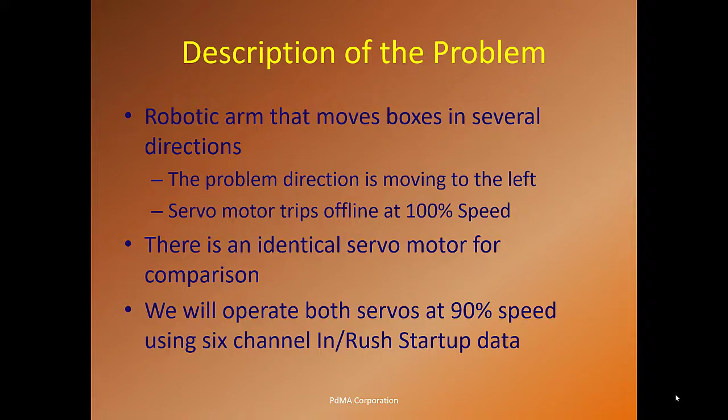So here's our scenario: it trips off at 100%. We're going to bring both our comparison servo and the actual problem servo to 90% and see what kind of data we can collect. We're going to bring in the MCEMax to help us out, and look at the online technology at this moment, and you can see just a little bit different. Here's the arm moving from the right to the left, right, left, right, and we're capturing the current and the voltage on all six channels, all 3 phases of current and voltage.

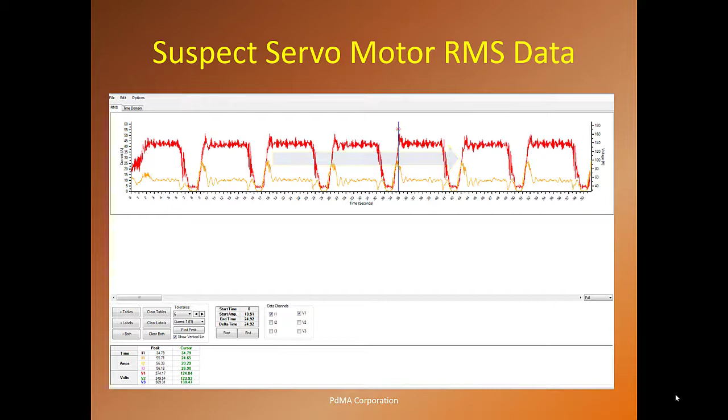And what is this telling you, Noah? Well, it's interesting because it is a lot of data, but when you break it down the way you have, where this is left movement and this is right movement, it starts to really take life. One of the things I remember jumping on early is, look at this current signature as it's moving to the right, it seems to be a lot less variable than the signature moving to the left.

So that kind of cyclic loading makes you have to question things. In fact, we start to lean a little bit towards a machine train anomaly, in that what in the load could be creating a different left load versus a right load. Is there maybe mechanical binding? Because you don't necessarily have it honed in yet to what this problem is.

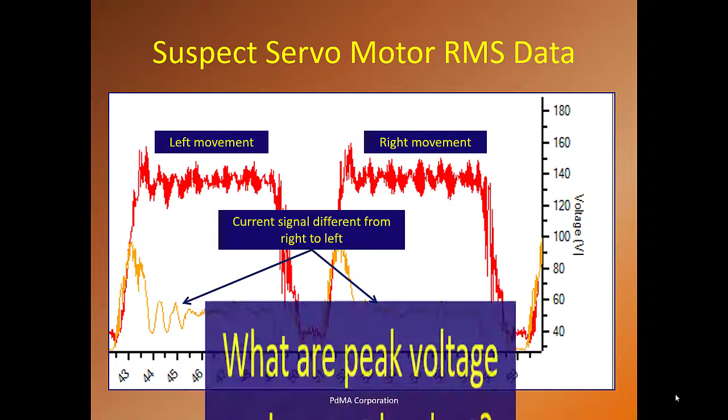So we're going to take some more tests, or look at different data points to see if we can get a better idea. Is it mechanical? Is it electrical? So we're looking at the peak voltage and current levels.

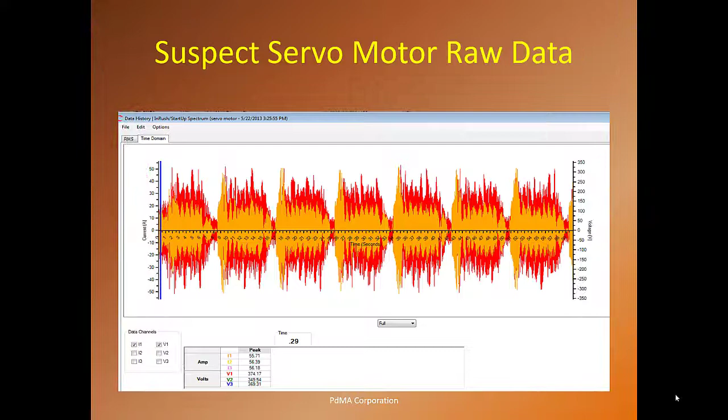What are they at? If I move on here, I can look at what we collected for the right movement and the left movement. Here our voltage and current is at 374 volts and roughly 55 amps, almost 60 amps, for an interesting voltage value. I remember thinking at the time that it's kind of a rare voltage to see coming out of a normal 460 to 600 volt supply. You're going to go through the drive, and you do expect it to change a little bit, but at 90%, it's a very interesting number.

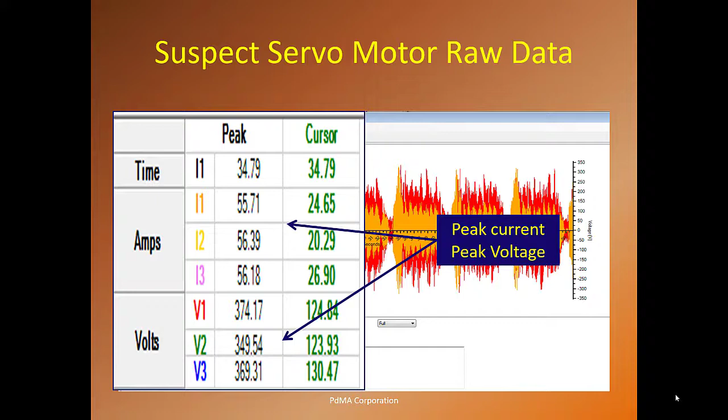So we're going to pay attention to this. Remember, this is your suspect servo raw data showing 350, 340, 370 volts versus 55 full load amps. So let's see what the actual one that isn't giving us a problem looks like.

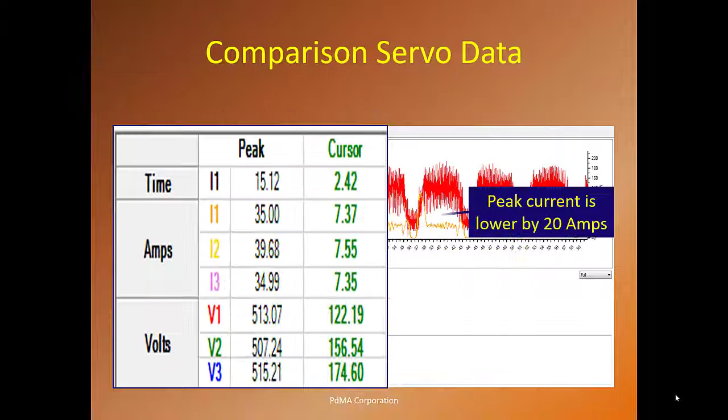And if we pull this in again and we're looking at the left movement, right movement — this is actually for the right movement now — you can tell the voltages are completely different and the current is much lower, a significant increase in the voltage to the healthy motor. When you think of the power equation, a higher voltage is going to result in a lower current for the same power demand, and in this situation you can see we're down under 40 amps.

This is a significant load difference for exactly the same demand of 90%. You're talking almost a 30% decrease in current. What does that do to a motor if it's running 30% higher over time?

Well, once you approach full load and you're running that much higher, you've heard the thumb rule — for every 10 degrees higher than design, you're going to reduce the insulation life in half. So even if they're not exceeding design at this point and they're going to trip the motor out, it's way overburdening the motor.

And it kind of now drives us more into maybe electrical, right? Not mechanical. Exactly, originally we were sort of leaning towards machine train. Now, when you start talking about voltage variations that are improperly being delivered, now we're going right back to the power supply and to the servo drive and looking at that.

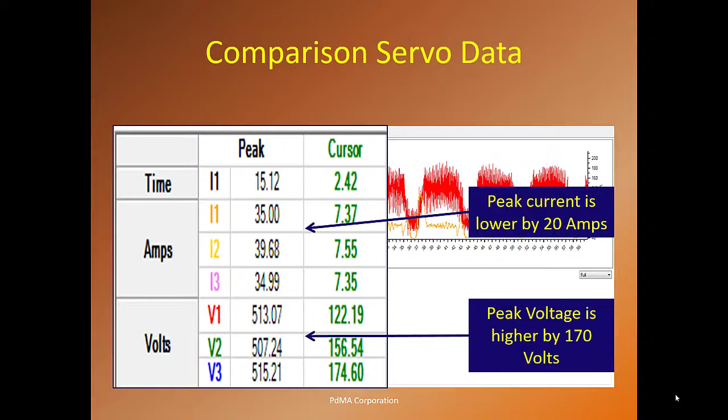And we can see here it's 500 volts versus 350 volts. That's a huge difference. Monster.

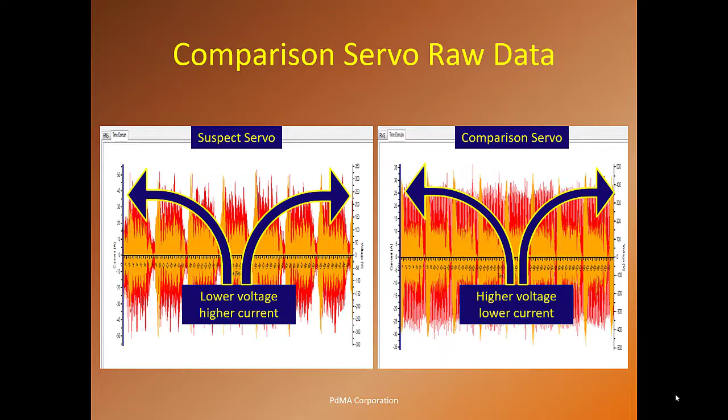Now, we always like to go back and think about other things to consider when we're doing servo analysis — give you little tidbits of information out there. Can you explain some of these for us?

Yeah, one of the things that's interesting with servos, and you and I kind of talked about this before, is that servos are very application specific. They're not sold into a common environment. So it's critical to get that baseline. You always hear us harp about getting the baseline, and when you don't have one, at least compare it to a like servo — which one of these is not like the other, that kind of approach.

And so that is absolutely critical, to get the baseline or the comparison, and that's really what gave us the insight to help make a good decision on this troubleshooting.

Yeah, and some of the other things here — let's not forget our 6 fault zone approach in analysis. You want to try and isolate, really eliminate areas that we don't have to spend any attention to. We really want to put all our focus on the problem area, and when you break things down into those 6 specific fault zones, you can really focus in and hone your skills on the area.

So in this case, for instance, if we did an MCE test and had high resistance to ground, we would not look at insulation. You're right — and one so often leads to the other, as a byproduct of another. And then lastly, that 6 channel approach really helped us go into, and also helps in our demodulation where we can look at mechanical applications now.